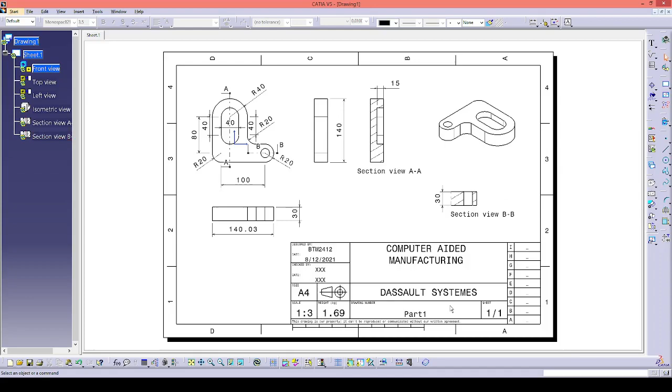We will start with the sketch of this material, and yeah, I've done the sketch. You could see it from here. So this sketch can be done quickly, with this dimension 80, 40, and 40 here again, 20, 20, and my starting point is the center position of this coordinate.

And then after I exit the sketch, I pad it, and then create another sketch on this to create a pocket with a dimension of 20 millimeter, 40 millimeter, and 20 millimeter, and these two will be concentric. And then after I exit the workbench, I select the pocket function here, using the sketch that I've defined earlier.

So the definition of the sketch is this rectangle with a circular arc on both ends, and then I define the depth of the pocket as 15 millimeter by clicking OK. Next, on the same surface, I create another pocket, which is for the drill hole.

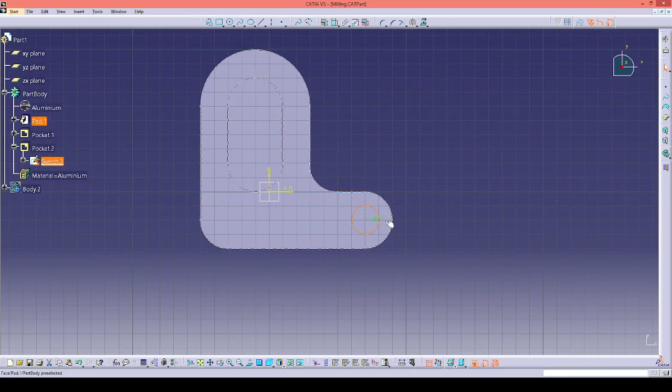So I start with just a sketch here of a circle with a diameter of 10 or 20 millimeter diameter, and then this circle is also concentric with the outer circle. After I exit the sketch, I create the pocket, and the pocket is a through hole of 35 millimeter.

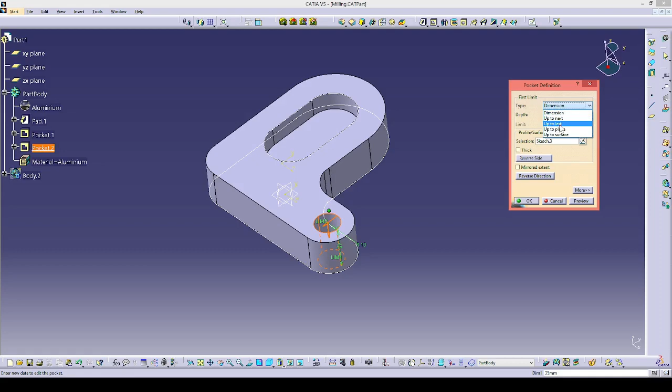So I can type the depth 35 millimeter by selecting dimension, or you can also use up to next, for example, to the last surface, or you can also use up to plane, and then select the plane. So you click OK, and you will have the same result of the through hole.

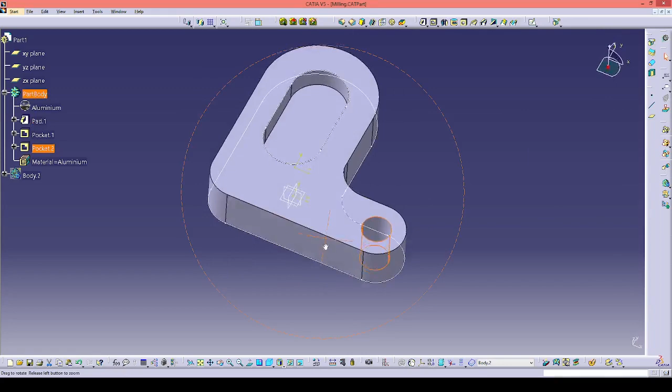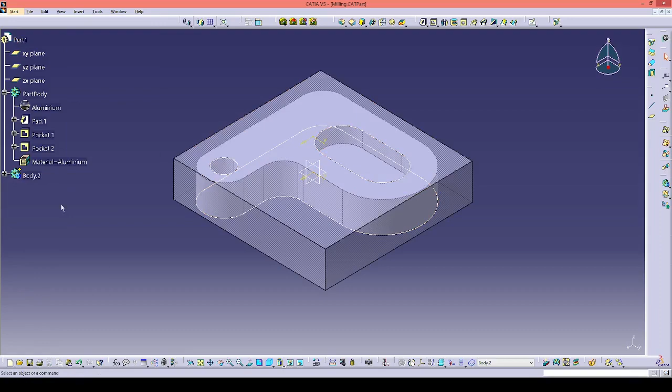So after you have finished creating the material, before you send it, you have to insert a new body. Click the part 1, insert body, and you have this body 2. In this body 2, I've already created it the same as before.

This pad is just the size of the sketch given here. So it is a square shape of 153 times 148. This size was created with uneven numbers, so maybe I can change it to something more sizeable like this.

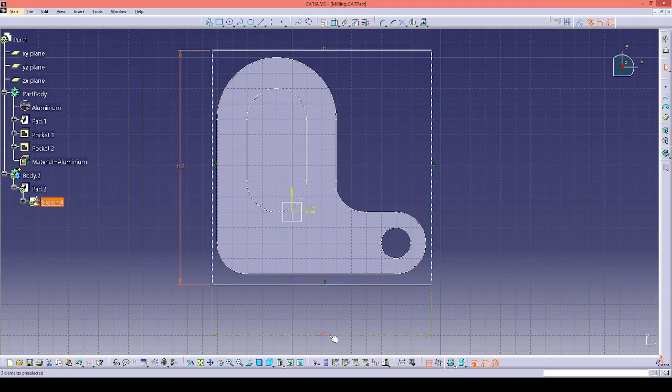Maybe I want to have 152 only, as the vertical axis, vertical dimension, and then 147 as the horizontal dimension. So I exit and then just pad it.

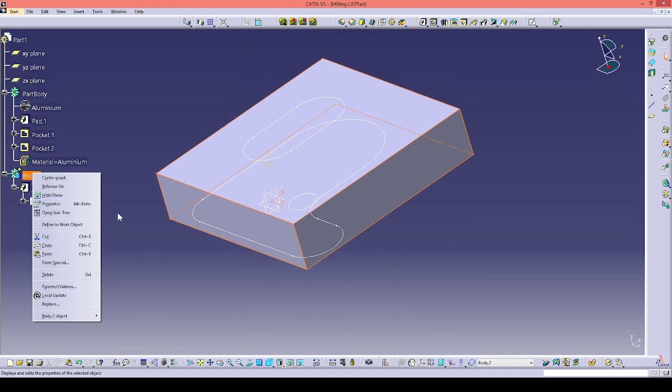So in this case, I've already put it under transparency. If not, you can go back to properties, graphic. After you pad it, a whole solid looks like this. So I change it by clicking on properties, or you can also use the alternate enter button while body 2 is selected, alternate enter, and under graphic you can increase the transparency, click OK, and you have it like this.

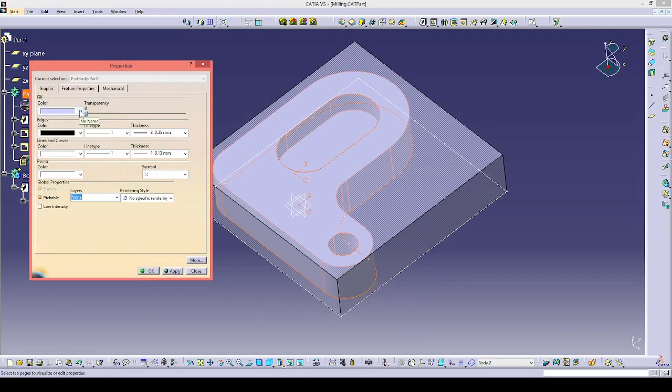And even to let people see my product, I want to change the first part body's color. So I go to Alt+Enter or properties, and change the fill color to violet.

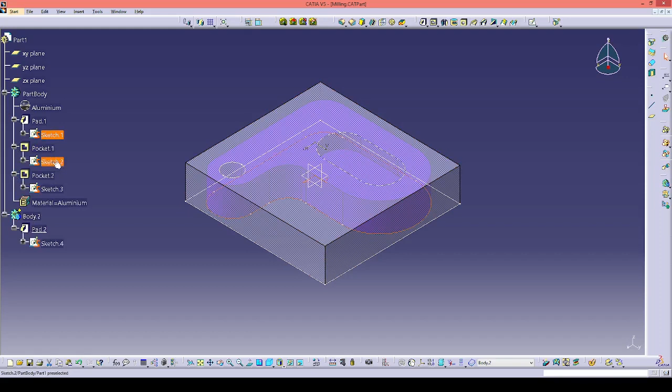So with this drawing, make sure you have shown all the sketches available, and don't leave them hidden. If a sketch is hidden automatically, you can manually unhide it or show it by right clicking on the sketch and then clicking show. Like this, it is hidden, and click again, it is shown.

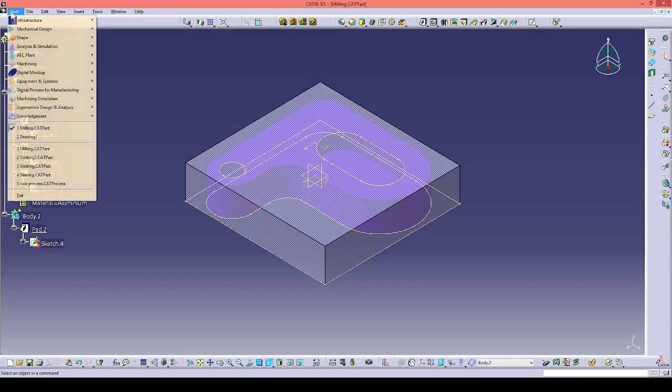So after you have this, define a material here as aluminium, and you can go to the next process of machining, how to create this part. When you send this stock part, or the raw material of a block shape, to the milling machine, you can go to start machining, and choose prismatic machining.

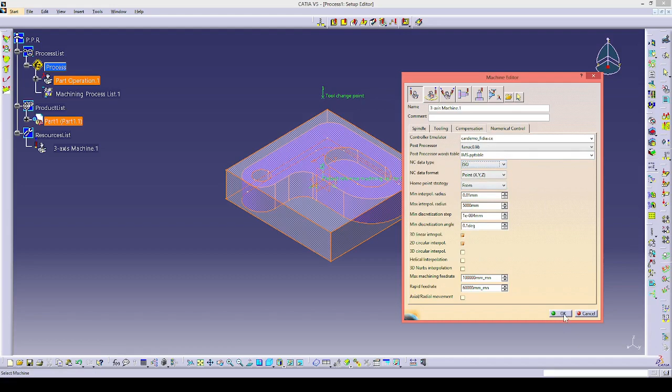Okay, so now you're inside the prismatic machining function. Here you have this process and part operation tree. Under this part operation 1, you double click on it, you will open a window, and here you have to select the machine. So the machine that you will be selecting is CNC 3-axis, and then don't forget, go to the numerical control, change the specific post processor to FANUC 0, and the post processor word table change to IMS PP table, and NC data type use ISO instead of APT standard. So ISO is metric. Then click OK.

After that, what you need to do is select the design part for the simulation, and the design part would be part body, or the first part that you have drafted just now. So double click on the part body. If it is not working, just do it again, until you have this.

Link to the part body, and then you click on the stock or the raw material. It should be the body number 2, the second body. Double click on it, and you have all the links inside. After finishing doing that, you can just click OK to finish all the processes.

Now you have defined the thing that you want to machine. Now what you need is to start with the machining process. So by creating the machining process, you have to click firstly the manufacturing program. Then of course we need to do facing first on top of the surface.

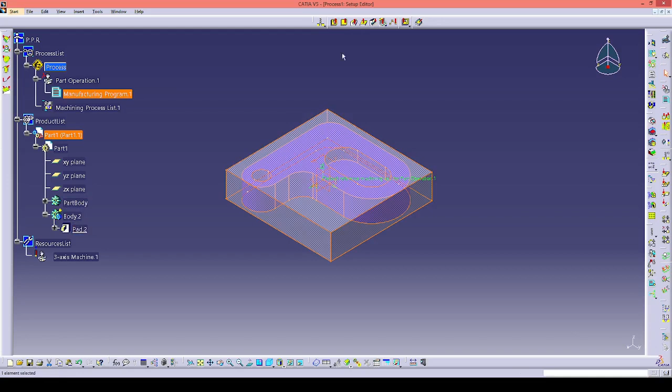So I use the facing operation, and the first surface that you have to click is the plane. So the top plane that you have to select will be the plane of this stock part or body 2, and the selection from this view is this small square. So you click on this small square first, and then as this body is still shown, not hidden, you just select on the top surface.

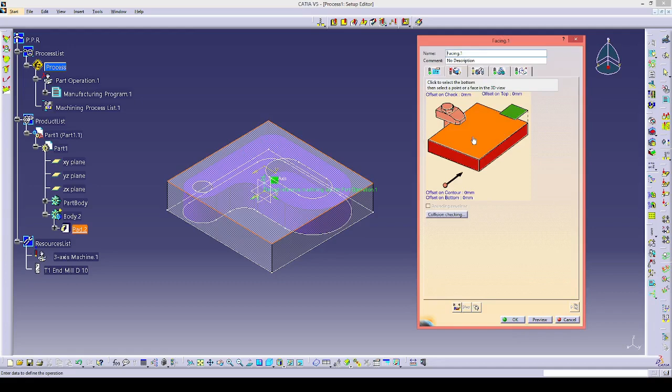After that, you have to hide body 2, click on this bigger square. So this will represent the surface of our product. So our product is this violet surface on top of it.

And then you have to go to the selection of cutting tool. So you need to face it, so you have to choose face mill, and the diameter of a face mill should be, yeah, this is standard. Actually you have different sizes. If in our lab you have 68, 62 millimeter diameter for example, but then you can leave it like this as a default.

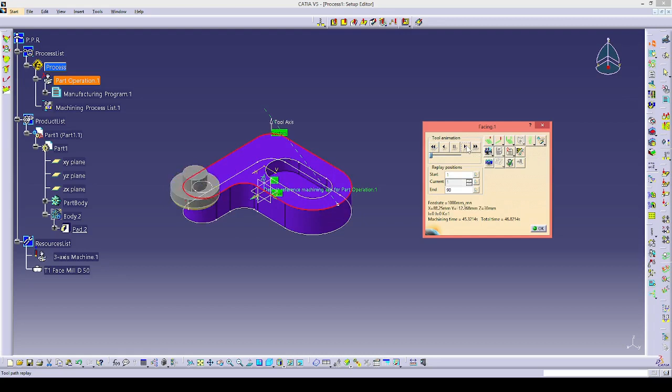And then you can look at the toolpath replay by clicking on this button, toolpath replay. So wait for a while, and then you will see the tool is already being visualized here. So you click on this, goes to start of toolpath or to previous operation, and you see it's moved to here and play forward. You'll see that is what the facing process will be done.

Then click OK as you have agreed with the tool path that you have created just now. Then to make sure that your cutting tool will not

collide with your workpiece during the machining, so you have to define the macro management here. So you have to firstly click on the approach, activate the button first, and then go down here, definition mode, change to axial, and then change it to, let's say, 50 millimeter, so that it has ample space between that.

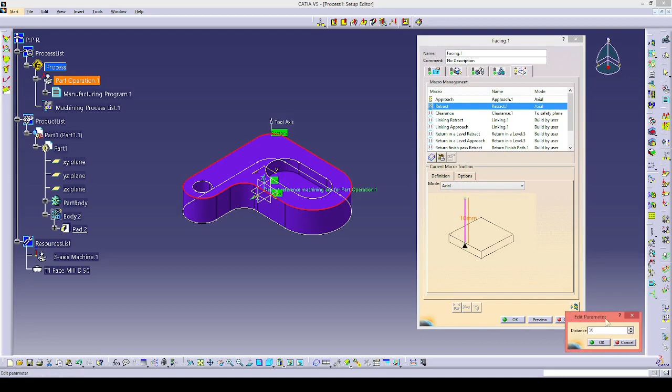And then it goes the same for retract. You have to activate the retract first, change the definition to axial, and also double click on the 10 millimeter, change it to 50 millimeter for example. Then you click OK as to finish the process, the first machining process.

So you have here, when you open the tree here, manufacturing program 1, you have tool change number 1, which is the face mill of 50 millimeter, and the process is facing.

So next, after you have done the facing process, you need to contour profile, or you have to remove the material of the bigger solid here. So to remove it, you have to hide it first. You have to choose profile contouring.

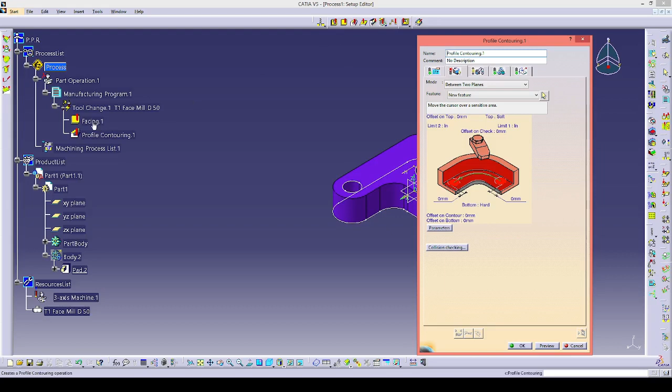I forgot to make sure that facing should be highlighted before you click on process, because that means you have to do facing first. After that, only you can do profile. So you can just cancel it, show you again, click on facing, and then click on profile contouring.

Wait until the window is open. The first thing you have to do is look at this frame. You see now you have two red colors there. If I move the cursor to the first red on this profile, the wording says click to select a guiding element, and right click for additional selection methods. So you just click to select a guiding element, and our guiding element would be this line.

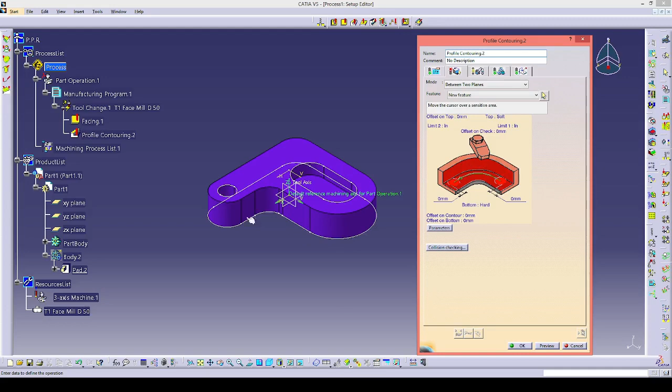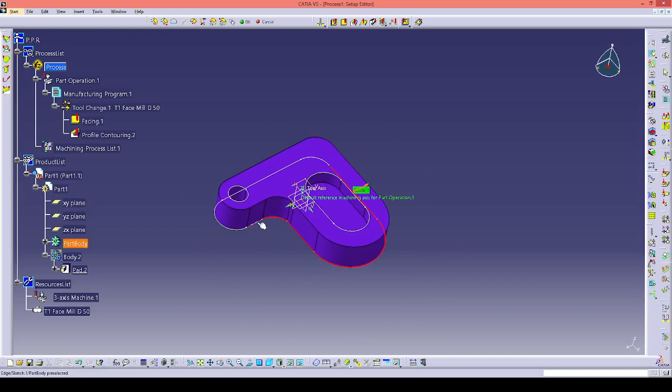Click on it first, then you have to decide which surface to start with. I would like to choose the first surface to start with, this one, then this one. You have to follow the sequence. You cannot change direction, otherwise you will actually damage the machine if you do it physically.

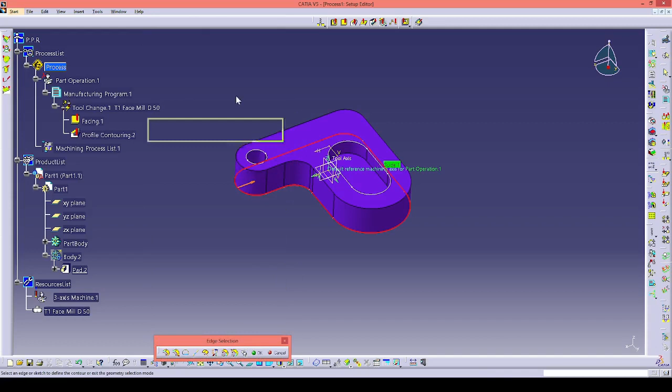After you have chosen all the lines, if you open this button for the first time, it will appear down here. So you just put it up here, and after you've done that, click OK. Then you have that line as a guideline.

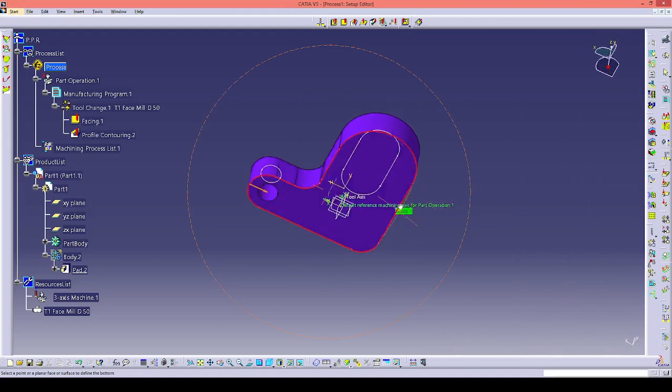Next, you see the next red color here as the lower surface or bottom surface. Just click on this surface, and you need to select the bottom. So the bottom that you want to define is this bottom, the bottom of this cutting surface.

Alright, so you have highlighted all the colors there. The next thing you have to click is the selection of the cutting tool. The last cutting tool you chose was face mill, and now you have to change to end mill, which has a size of 10 millimeters.

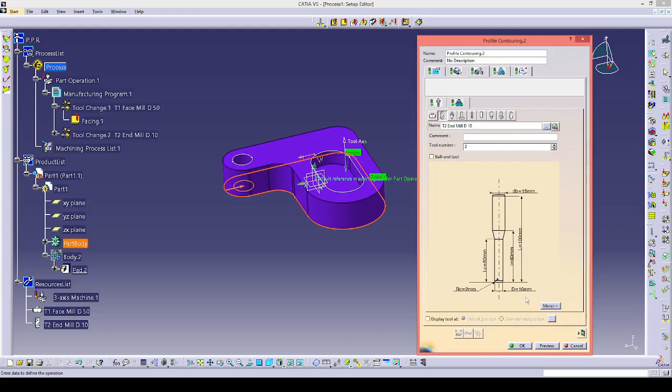So I can look at the toolpath replay by clicking on the button, and you see it start somewhere there. It's collided with the workpiece because I haven't set the macro definition yet. So I just want to look at the toolpath. Yeah, it looks good.

Click OK, and then we need to go to the macro management, change the approach, activate the approach first, and change the definition to axial, giving it a number of 50, for example. Then for retract, also activate it, go to axial and define it 50mm. Then set OK.

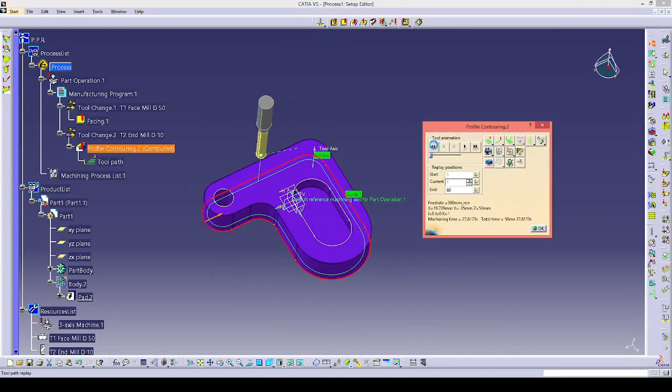You can also look at the video again if you want. Just double click on the profile contouring just now, and then click on this toolpath replay. So you see now I have a different position of our tool, and if I look at this, it will move like that.

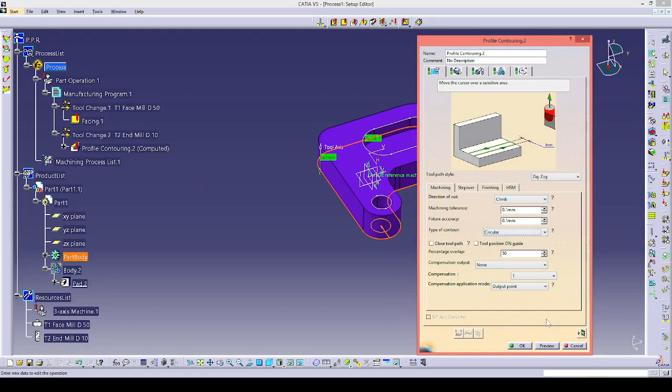Next, the toolpath is also shown in this dotted line. Alright, so next, okay, before that, let's do the next operation.

Which is pocketing. By clicking on this profile contouring tool, you have to select the next process, which is pocketing. Now we have the next figure to select, so the guidance will be this first contour or first surface.

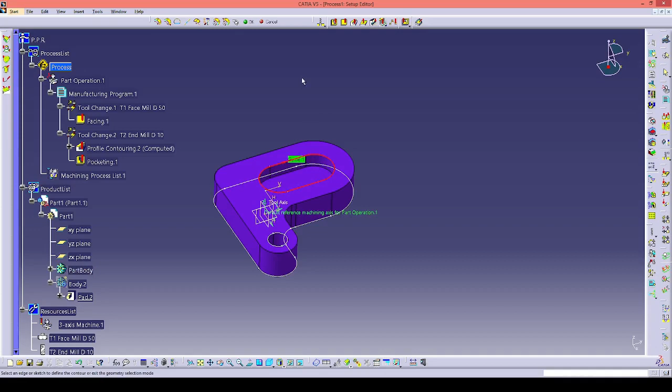Click on this, and then the surface should start with this white line on this pocket. I start with this one, next, third, and fourth. So I have selected all the lines that represent the pocket, and click OK.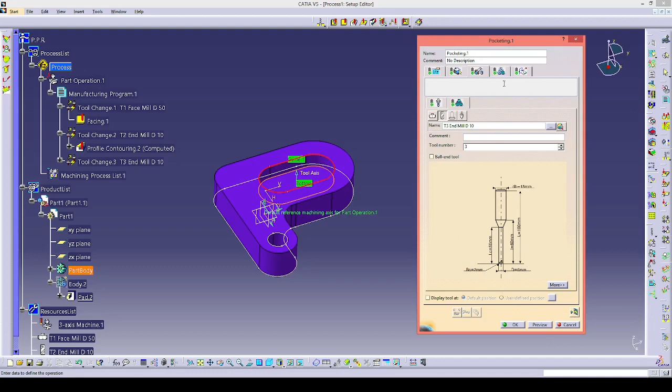Then you have to activate the approach, and also the retract.

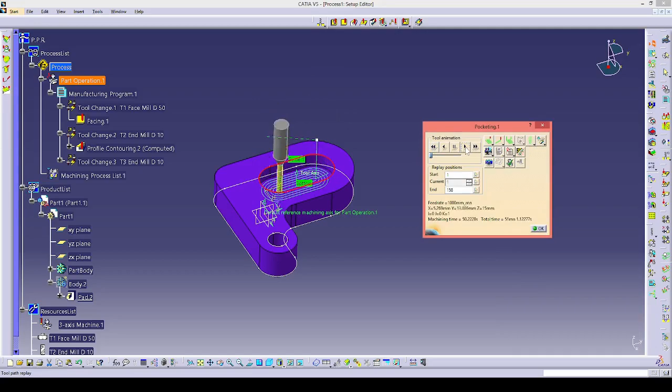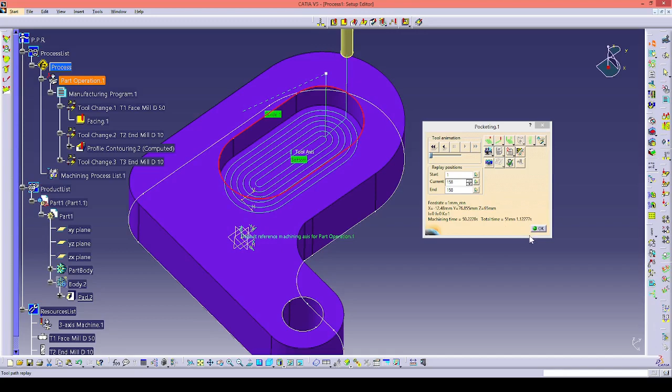So you can see, with the size of 6, you can get very good feed. So you look at the toolpath, it has more than one circular path. So you have 1, 2, 3, 4, 5, 6, meaning that all the surface will be swept over by this tool mill, so our cutting surface will be better.

Okay, I click OK with that. Then the last machining should be drilling. So I want to have this surface being drilled, so I change to drilling, and the drill process will be this figure. So what you need to do firstly is

click to add positions. So what you want to choose is this, where is it? Double click on this line, okay, and then this diameter you change to 35 as the depth of our model just now. Okay, and then you change to drill, the tool for drilling. So the drill diameter was 20, so you can also use 10.

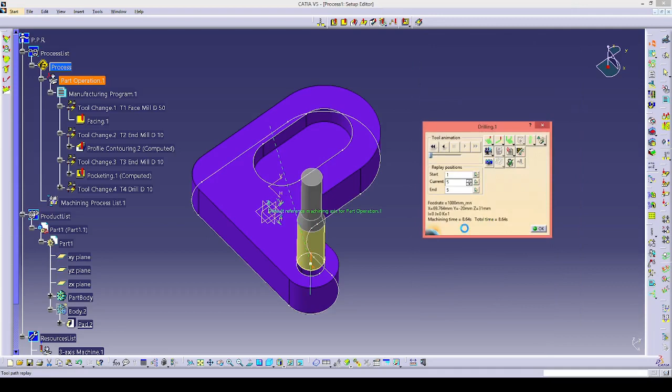Let us look at the - okay, if I use only 10, you have to change to 20 because the diameter was 20. Alright, then let us look at the process. So the process is just a 20mm diameter drill. If you want to look what happens if I choose 10, we can do so.

So from this simulation, it's only creating 10mm diameter. So let us put it as it is first. Build by user.

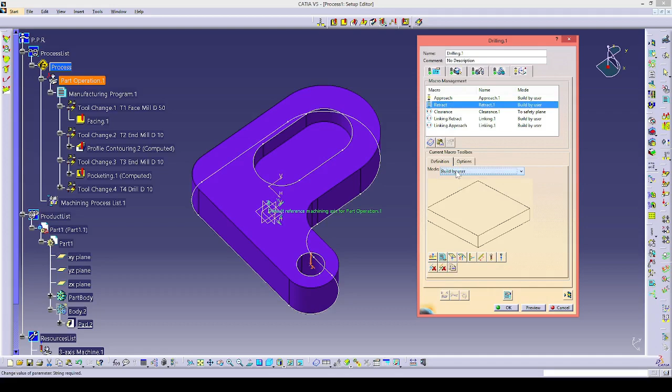Okay, so I think we have done all the processes that we required to create this model. And then what we need to do now is look at the whole process again. So we can simulate it by clicking on manufacturing program, right click on it, go to the bottom of this window, and then go to start video simulation using toolpath.

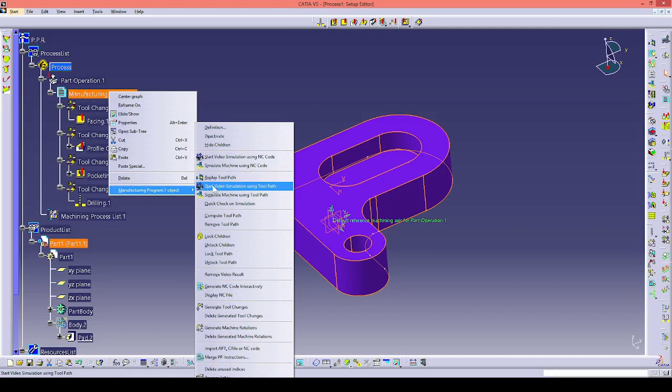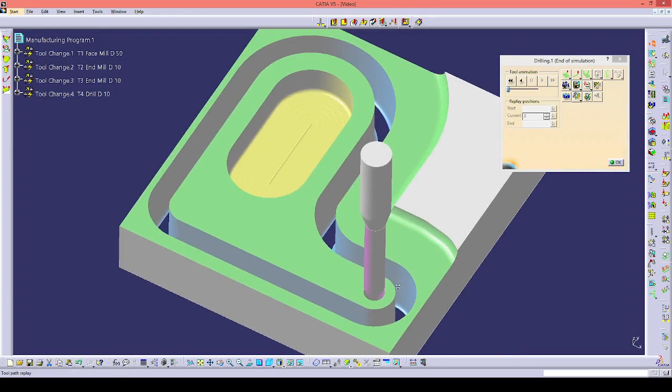So just by clicking on it, you have this model. So I rearrange it, then I can just click forward to look at what will happen after I create the machining. So you see this cutting diameter is 10, so the diameter of our hole is also only 10. So we need to change it to 20mm to get the bigger surface.

Or you can also just add another drilling process to get the required diameter of the hole. So still we have this pitch. This pitch is saying that we are doing roughing, and we should choose the correct toolpath to have a surface finish that is required.

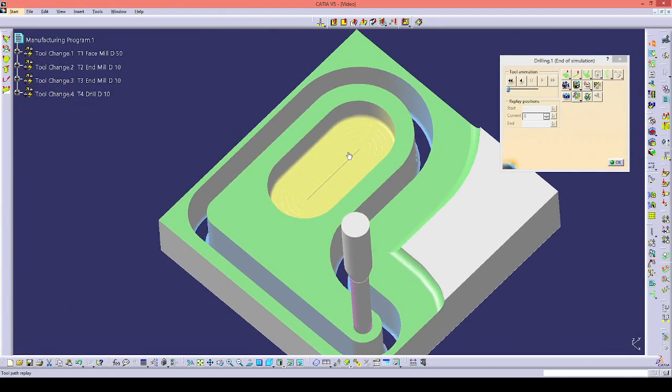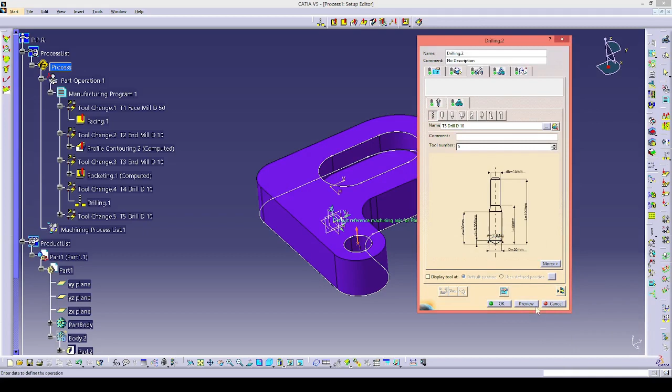So just go back to this process, and I think you can add another drilling process with that. And then I change this to 35mm, and I have to reselect the size, and this one is 118. That is the common one, so I want to change it. Yeah, so I think that will be good.

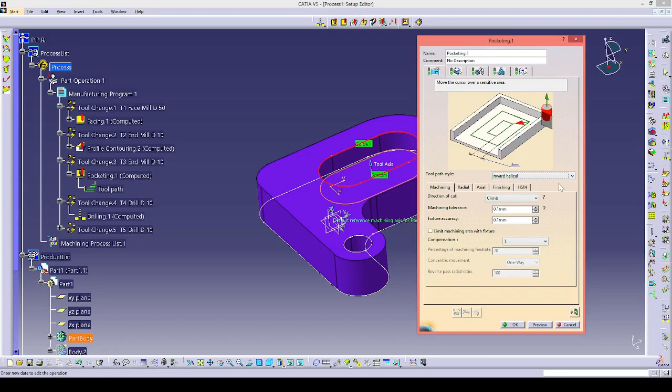So to correct our profile, this is the pocketing. If I want to change the cutting tool and also the process, I change to toolpath style inward helical, back and forth. Okay, let me look at this first.

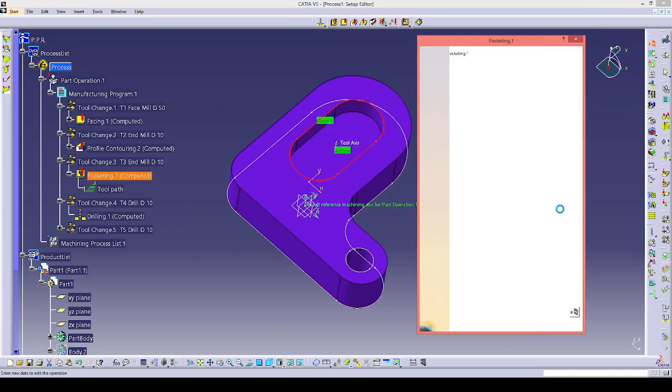So maybe we will have ripples back in the middle, but we need to change to machine tolerance 0.05, fixture accuracy 0.05. So let us look at

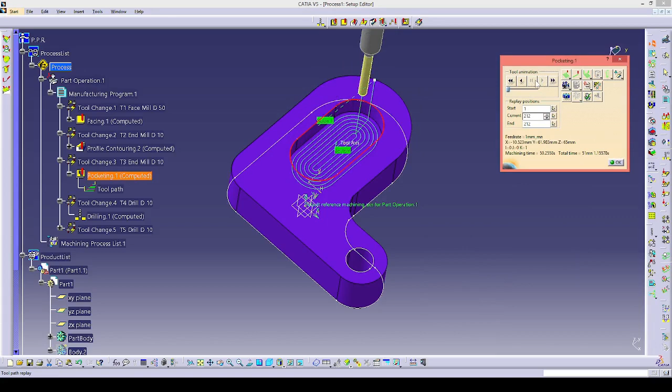toolpath. I think this one should be better. So let us do the simulation again. Let's rearrange the thing and start.

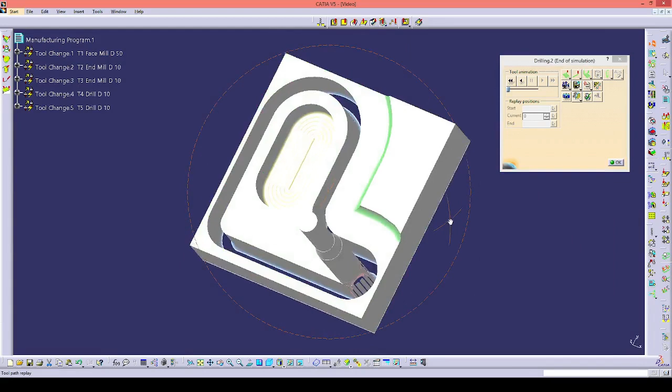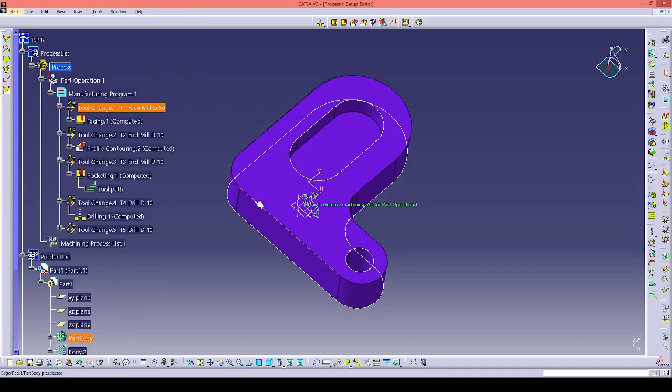Okay, so you see something happen here. The definition of our contouring is too small, I think. Yeah, so it means that we didn't set the profile contouring correctly. So it means that during the contouring process, our cutting tool is eating or feeding more than it is supposed to.

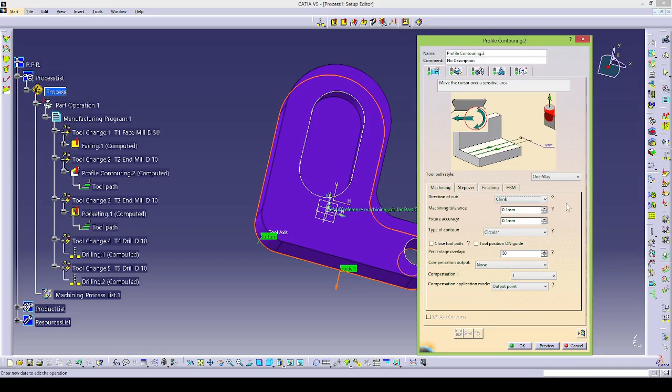Alright, so we would like to check back on our contouring, and by default at this profile contouring, the cutting movement is given like this. So the direction of cut should be climb, meaning we cut from small to big. This is the correct cutting instead of conventional, big to small, or thick to thin. That is not good for our cutting cutter's life. And the percentage overlap is 50%.

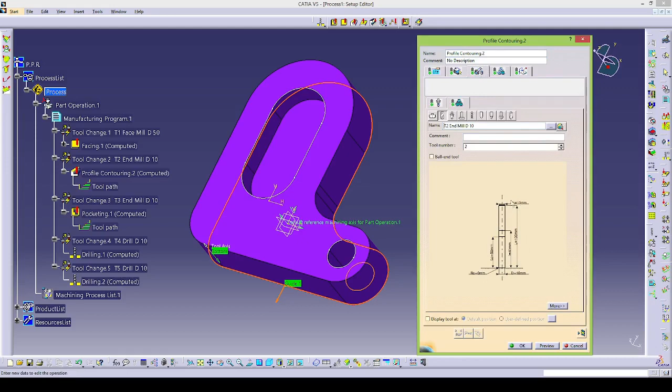And then yes, we have set the guiding element, which is the contour line out there, and then the bottom part here. And next, what we could check is also the offset contour. So the offset should be 0, and then the cutting tool I've selected is 10mm diameter of cutter, and then this is the holder. So I change the holder to 10mm so that we can have a cylindrical tool, so that we can see clearly when I put it in this normal plane, and the cutter radius

is 0. So I would like to see what toolpath it generates from this motion.

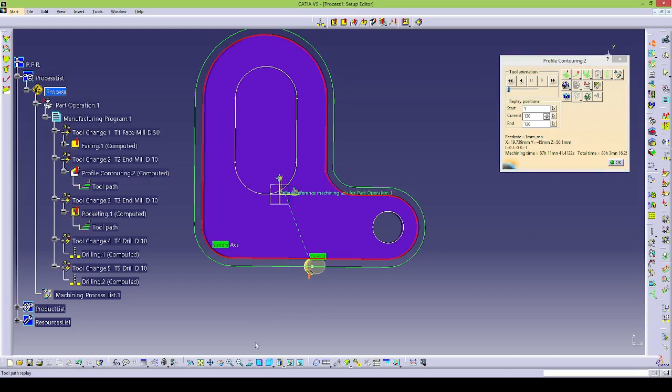I also forgot to tell about one thing. Firstly, I would like to check whether this cutting tool is colliding or not with the surface. So it looks like nothing happened, no collision, so it is good.

The other thing I haven't told just now is to have a finishing process. So I set a finishing process, and by default it is put as no finish pass. So what is finish pass?

I want to set the first several cutting processes as roughing. So from what we have done just now, we only defined roughing for one step with a depth of cut in one way only, so no definition of cutting diameter, maximum depth of cut, and we only have a number of levels, 1.

If you want to change the maximum depth of cut, we can change it here. Maximum depth of cut is 0.5, so we can also define this. Lastly, we need to select side finish last level.

We can click on this arrow, this question mark, to see what is actually meant by side finish last level. If you want to look at the contouring process, this is what will happen with a depth of cut of 0.5mm, and the last step will be the finishing, right?

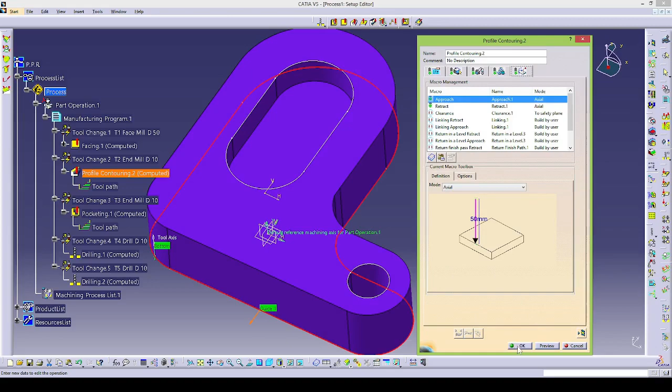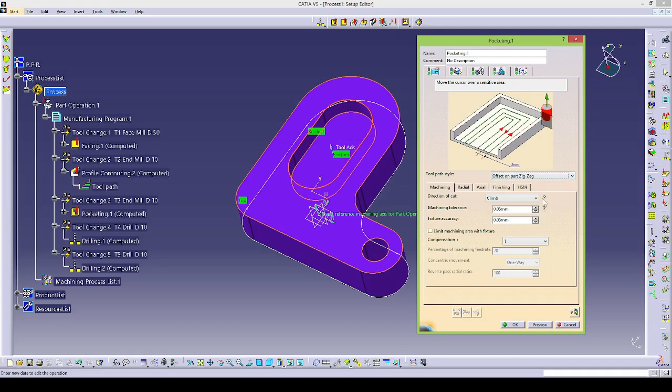Lastly, for the tool path of cutting, just now I set the default machining tool path, and I changed it from outward helical or inward helical to back and forth, or we can also set zigzag, so that we can make sure all the surface is passed through by the cutting tool.

If you want to look at this, we can also set side finish last level, and the side finish thickness is 0.01, for example, and side finish level you can look at there. This is the thickness of side finish path by level. So you can check it to 1, and this is the side finish thickness of 0.01.

And then termination radius, this is all as mentioned, and the number of levels.

If you want to change the distance between paths, you will have to look at this. This is to set the distance between two tool paths, tool center. So this is the level, or this is what we also mean by feed.

If you want to change that, you can also use tool diameter ratio. It will automatically be set with the percentage of tool diameter 50%. Overhang is being set to 50.

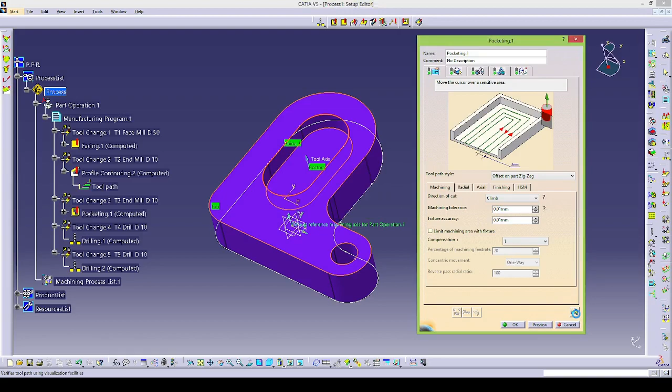For this tolerance, I want to change it to 0.01, and I'd like to look at what type of cutting path it will create. If I simulate this, you can see the motion is there, and the machine time written here is incorrect because of our process output.

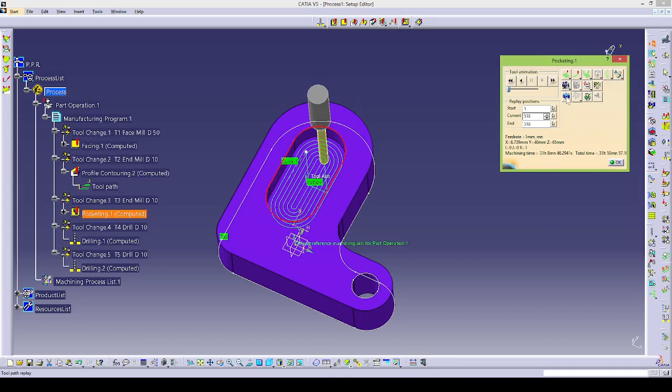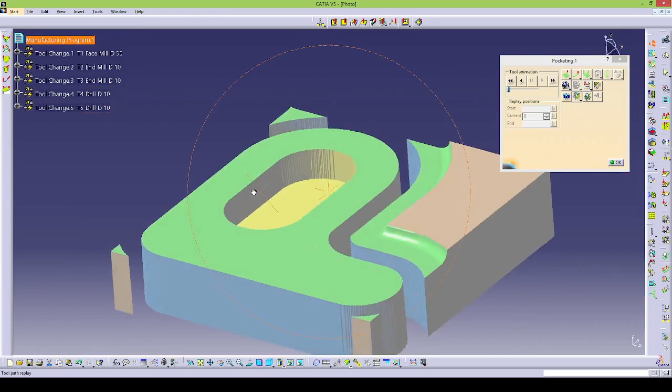We have to click on the camera picture. We can see we have a very smooth surface on this plane, and only the surface up here is not looking very smooth. There is another method of how to finish that surface as smoothly as possible.

So that's actually, we need to have another operation by using contouring. Okay, so with that, I think we can start our machining operation.

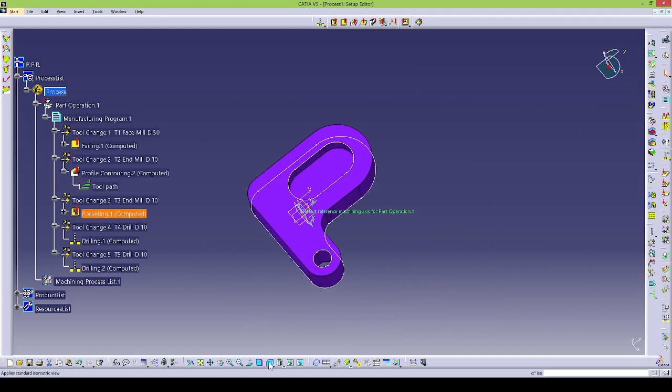If you look at the machining, if we haven't set the cutting, we can just click on this point and then double click on the hole that we have created, and it will automatically create the distance of the depth and also the hole diameter.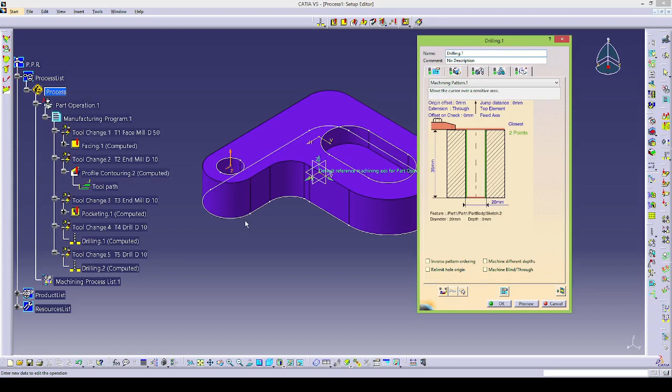So the hole is already set at 20, but the depth was 35. In my drawing it was 30, so I think this one has a different thickness from what I've drawn just now. This is from another part drawing, but it's okay, just leave it there.

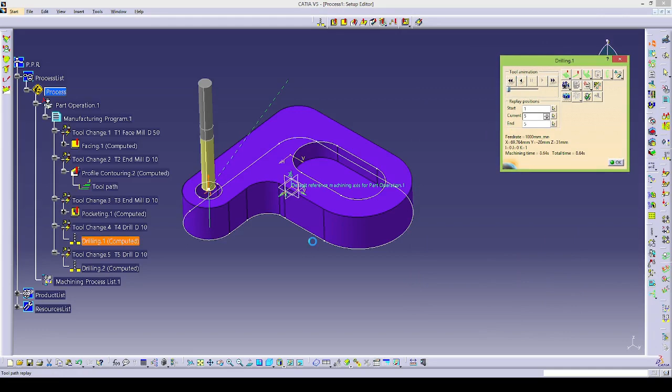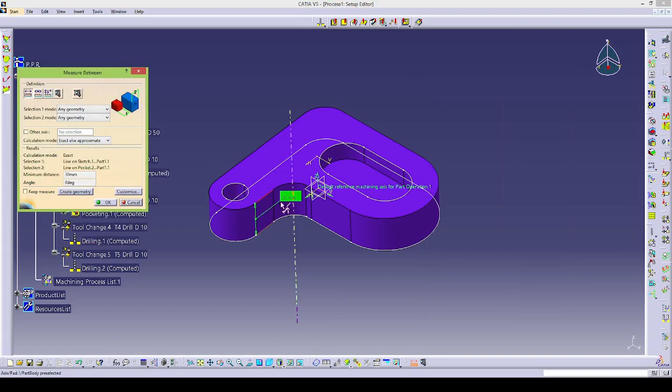And then we could also check the simulation. So with this cutter diameter of 10, you can only get a 10mm diameter hole without a 20mm hole. I think if I'm not mistaken, the thickness is correct, 30, not what I said just now. Yeah, the 35 was created for...

to make sure that this hole is being produced thoroughly, so a true hole should be produced, not a hole with burr there. So because the definition of our hole is 30, if we stick with the 30mm drilling distance, it will create some leftover, which is the distance B, for example, breakthrough.

So we can also change this drill diameter. Instead of changing the depth here, we can also do it somewhere else, but I have this set at this distance, so we can leave it like that. Okay, and then we change the second drilling process. Again, this one I didn't change anything, I just put it like that.

And the next one is the same, 2 points. I think this one was set at 35, and this should be through. Yeah, okay, so click preview and let's see what it will create as a hole. Okay, so the hole was not created thoroughly, so there's some leftover burr there.

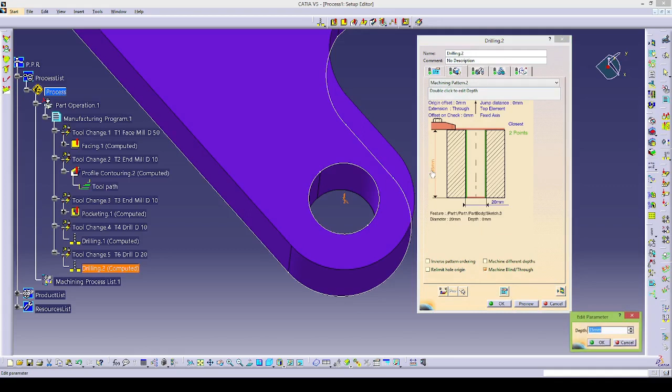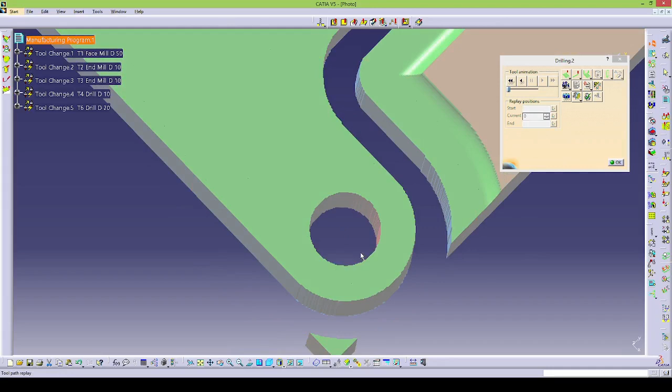So let us look at the product. Oh, sorry. Okay, now we have a through hole, a complete through hole.

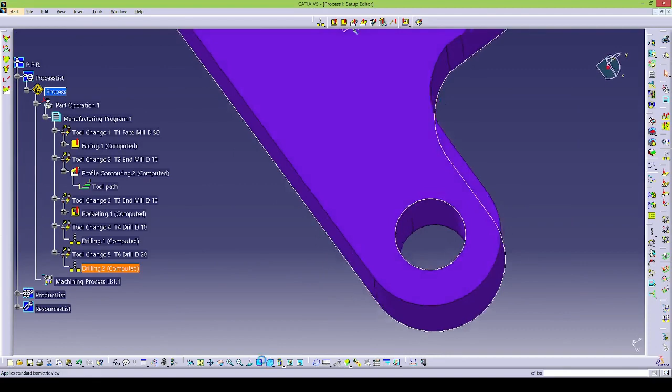So with that, I think we can finish our cutting and look back at the simulation.

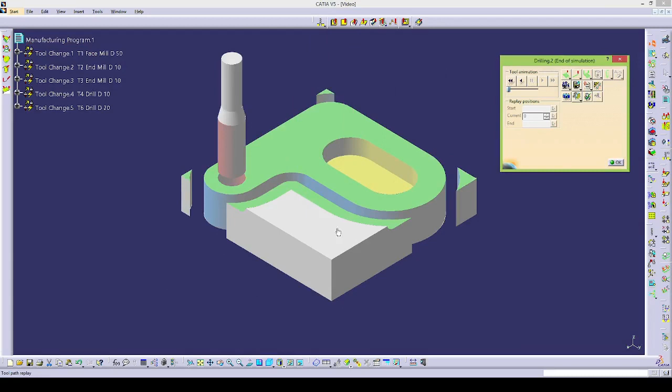Alright, so we have the finished product. It should produce what we have said. Another thing that I forgot to tell is that for profile contouring, as I mentioned earlier, I changed this cutter radius to 0 in order to get a smooth edge down here, or no burr at all.

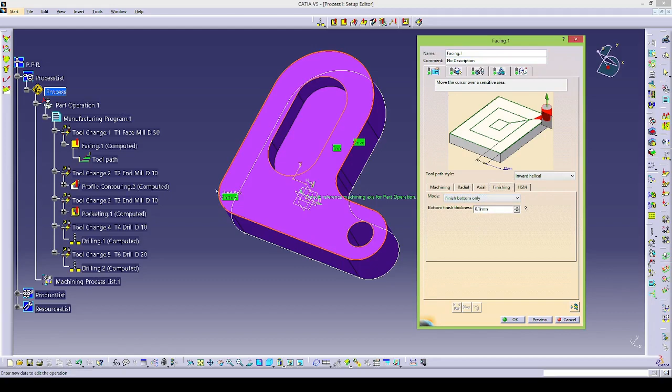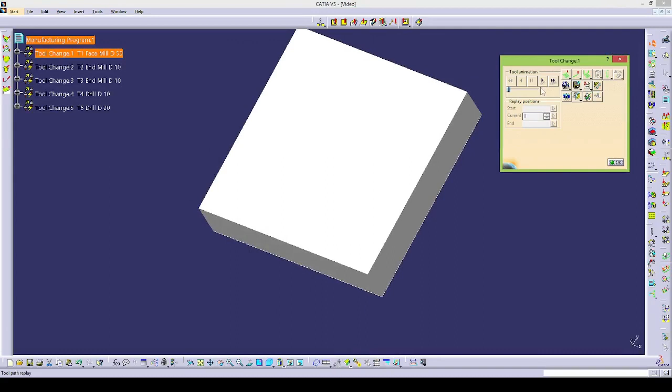So the difference will be seen in our simulation, and also in the G code at the end. Okay, so with that, we could already produce our G code.

So where do we want to create the G code? From here, manufacturing program, right click, go to manufacturing program 1 object. Down there you can select generate NC code interactively. In order to let this happen, you have to define what I've shown at the beginning of this video. You have to select the options in machining, output, IMS, and it goes like this.

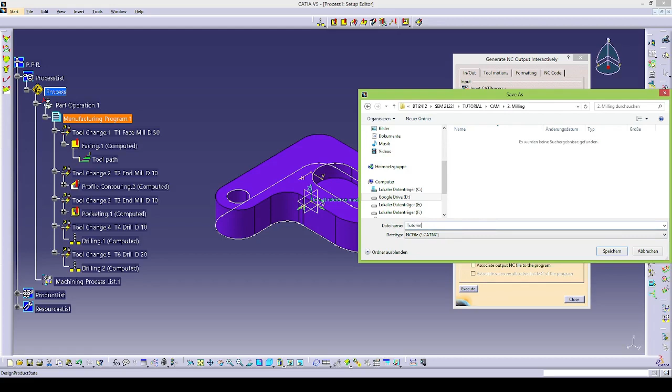Okay, so manufacturing object, generate NC code interactively, and then you select NC code and select the output folder where you want to have it. In this example, I want to save it as tutorial video, and then I just click execute.

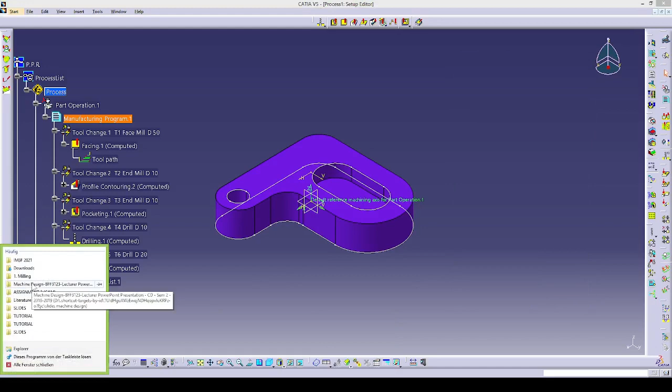So for the program number, you can select any number that you want. So it should just be created. Wait, it should be created. Okay, it should be down here, and the code should be written under CATNC data. So now we have this program written with 128 lines.

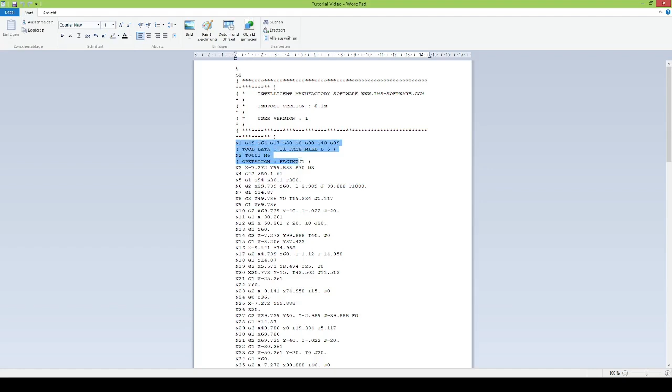Yeah, 128 lines, so we can check line by line whether this is appropriate for our machining, to be sent to our machining center. Okay, so with that I conclude the class. Thank you very much, and see you soon. Bye bye.